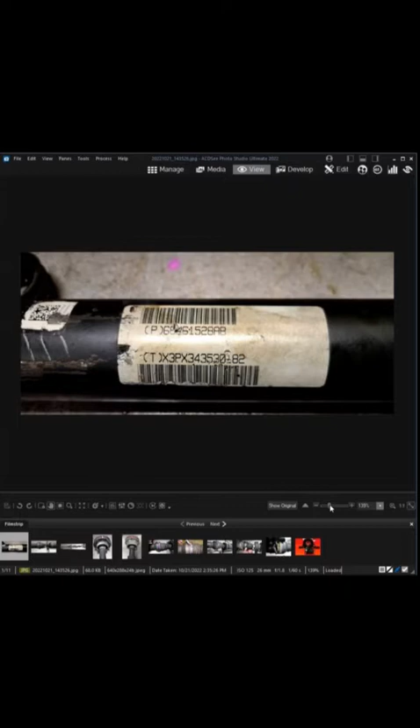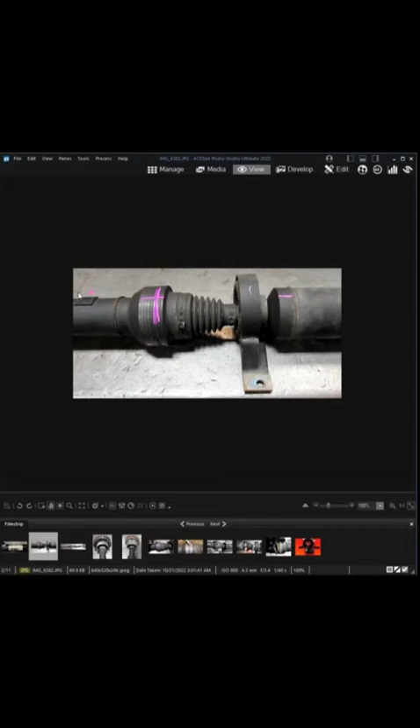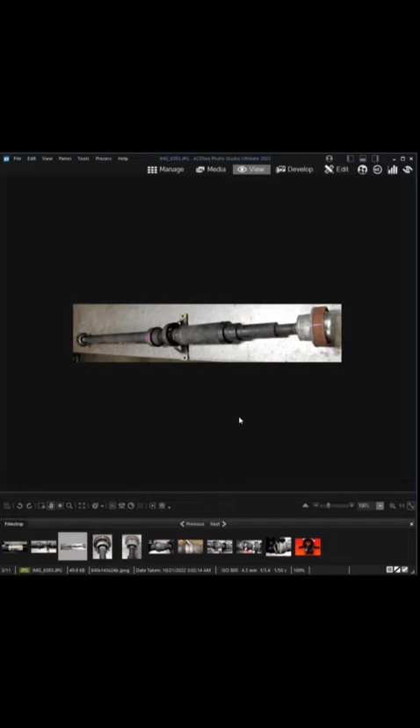Just a longer overview. The end of the CV, I mark it where I'm taking it apart, and I mark it down here. The bolt holes are not aligned when the shaft is together. One bolt hole will be straight up, and at the other end it'll be right in the middle of two bolt holes, just to give you an idea. Give me a little, there you go. So right in the middle, and the other end. So if by chance you lose or forget to mark it, it's a little help.

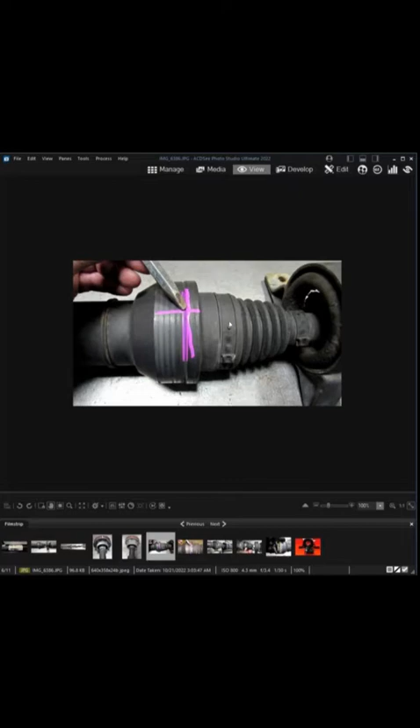So basically I got a vise with pipe jaws in it. If you try to do it on the table, it'll kind of roll around on you. I'd put one section in the vise lightly. You don't need to chew it up. You'll take like a punch or a chisel, and you need to peel this can up just a little bit to get it off of here. Push it back a little. Just a better. So it's just peeled over just a little bit.

Here you can see I started taking a screwdriver. It just turned out to be a little easier. Try not to deform it too much. Probably going to put some RTV in here. And as far as crimping this back together, you can take a hammer and kind of tap it down, roll it over the edge. But I'd definitely put RTV on the inside. And if you don't care what it looks like, put some on the outside too.

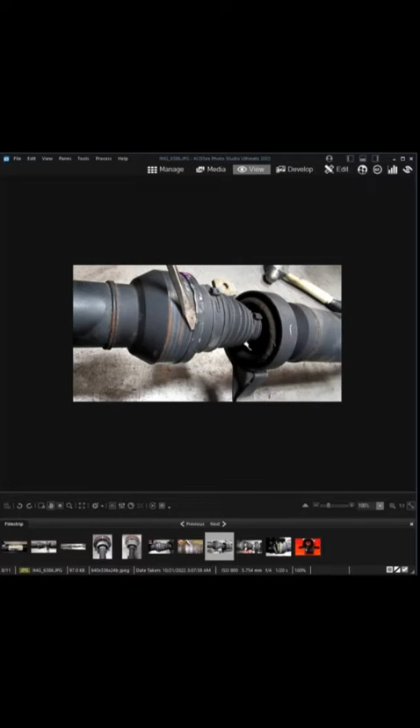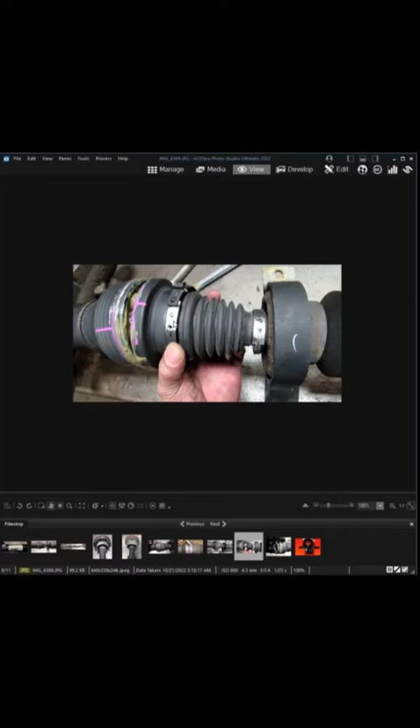Alright. So peeled it up just enough, tapped it away. Went ahead and loosened these clamps while it was together, because you're driving a screwdriver underneath it to pop it up. If you buy the new carrier bearing kit, some come with a boot, some don't. I actually cut this one out of the way to try to disassemble the shaft according to another generic CV that I've seen taken apart, and it wasn't necessary. Not going to rebuild this shaft, it's just for tear down, so ain't worried about it.

But some of the other pictures or videos you might see, they tell you to drive this inner race off this shaft. It's pretty hard to do. This metal can's kind of in the way, you'll end up damaging it.

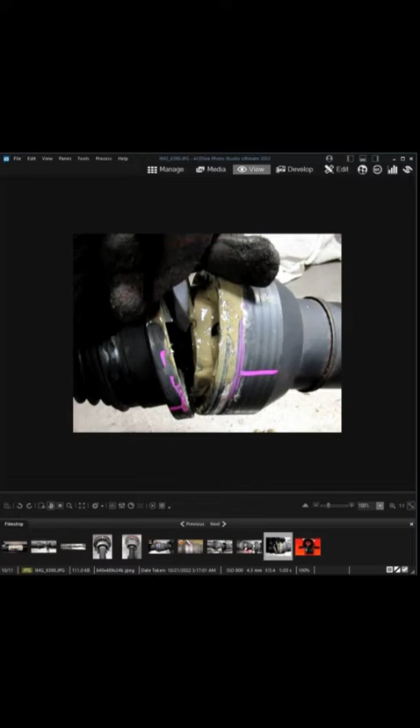Alright, we're going to go ahead and pause her now, and I'll kick on some videos and be right back.

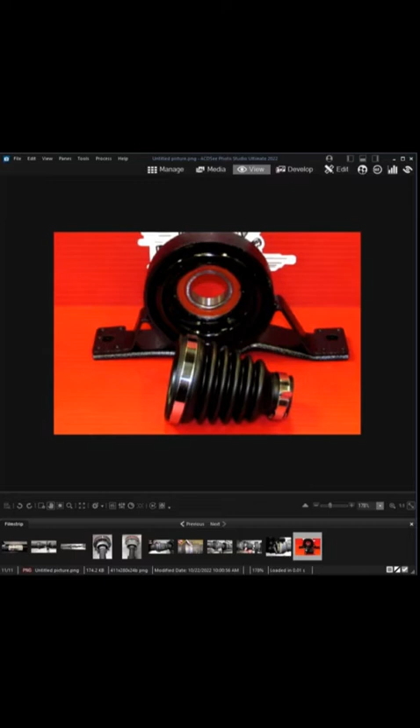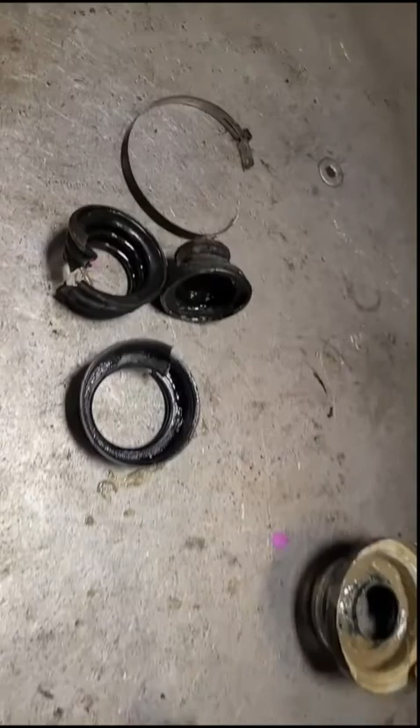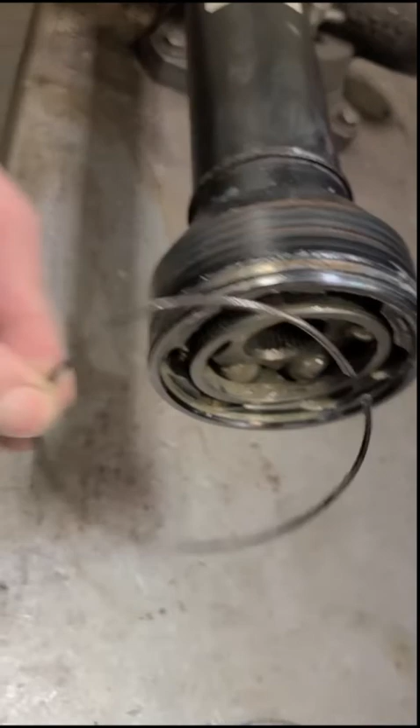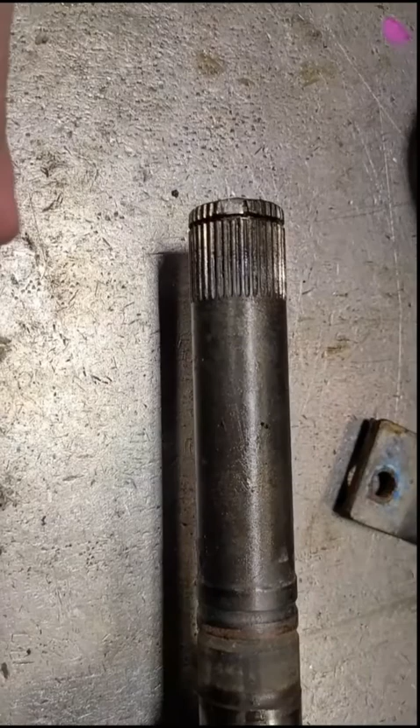So give away a little secret here. Got the two shafts together. Okay, everything's together. To get these two apart, there's a snap ring in this outer race. Pop that out, the whole thing will fall apart. Next problem is getting that inner race off of here. There's a snap ring in here, so you got to push that race off. This one here destroyed the snap ring, made a little mar on here.

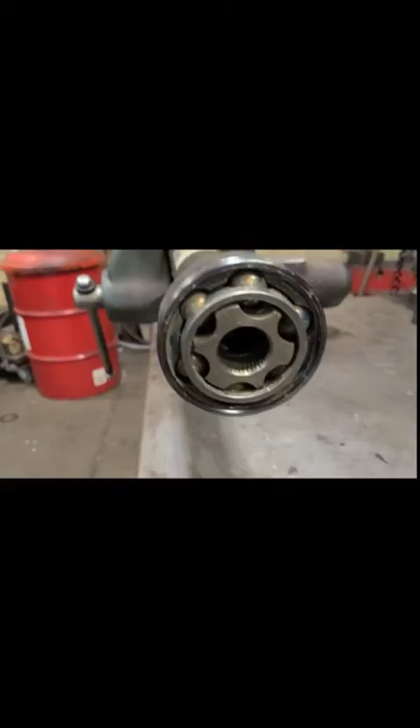Little tip here, when you're reassembling it, narrow window, wide window. You see those are kind of the same, but narrow and wide. If you try to put this one there, the thing will be locked up. You won't be able to turn it. It won't swivel. So make sure narrows with wide. Narrows with wide.

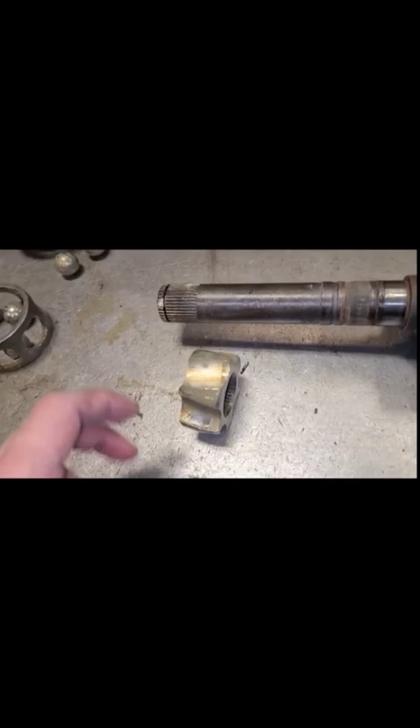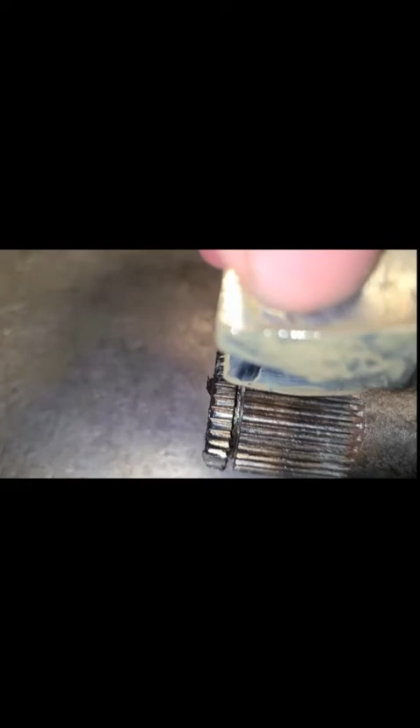Let's talk about this inner race a little more here. So as you can see, it's tapered on this side. A groove on that end. It's tapered, that way you put a snap ring on here. Taper helps the snap ring drop into the groove. Once it gets pushed on far enough, that snap ring will expand into that groove and keep this from sliding. I tried driving it back to get that exposed. Ain't happening.

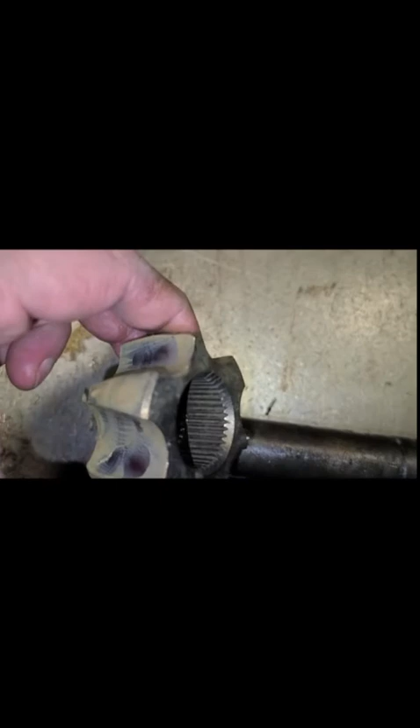So the best thing to do, get it to this point, put this in a press with a bearing separator on the back side, press on the front, and drive this off. It'll do some little damage to the groove and the snap ring will be destroyed, but at least you got her off. Then you can proceed to press the carrier bearing off.

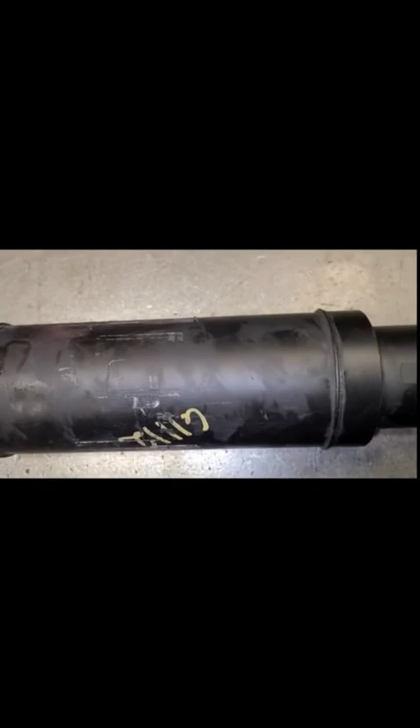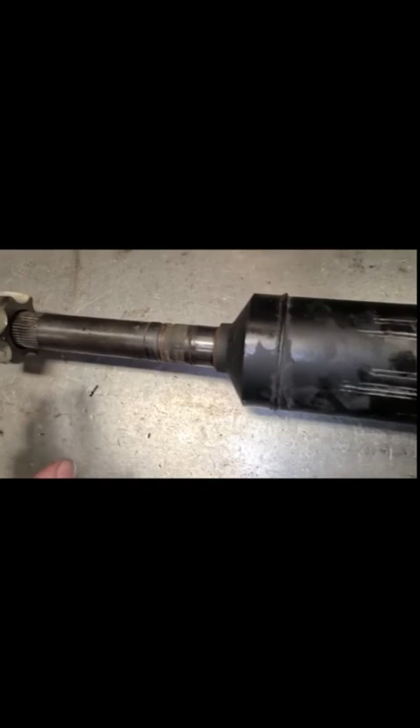Reassembly. You know, it's always a good idea to mark everything too. Try to retain your balance. So as you can see, I marked that end and the other end of the CV. I'm not even going to bother with this shaft. It was just a spare.